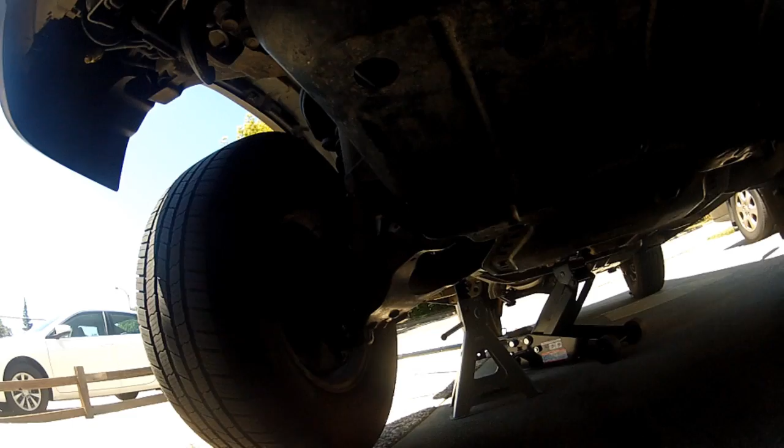Going out to the truck. Not ideal because I'm at a slant, but I got two good chocks in the rear of the truck. I got just the passenger side up, resting on a 6-ton jack stand, and I have the hydraulic jack sitting underneath the cross member with a little bit of weight on it just so it doesn't move, so in case that jack fails, it's a backup. And here's the chocks, so I won't roll back. Ideally, it'd be better to do this on a flat surface, but I can't start my truck to get into the garage, so I'm going to work on it right where it's at.

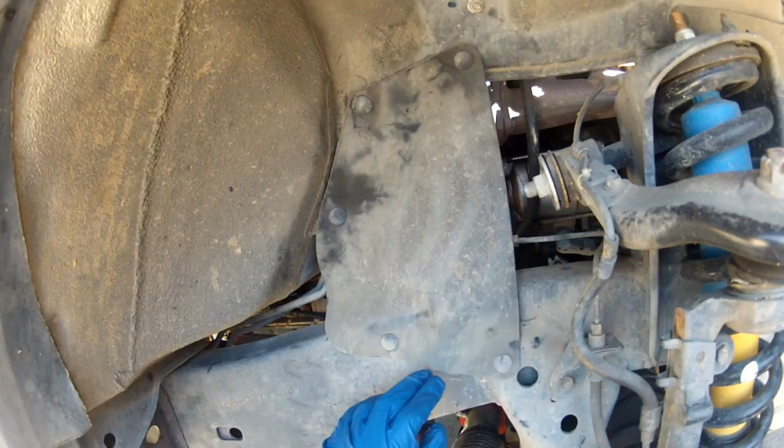The next thing I'm going to do is take off this little rubber cover. They just kind of slip off these attachment points. I don't know if all the years are like this, but this seems pretty easy. And I just want to see what's going to be the best way to get at the starter bolts.

This is the starter right here. The contacts are down here, you could see them. So I'm just looking to see how I'm going to get this thing off. I think I'm going to take the rear skid pan off and see if it's going to be easier to get to the bolts from the bottom as opposed to going maybe behind the exhaust here. So I'll figure that out and come back.

Okay, next I'm going to take the rear skid pan off. These are 12 millimeter.

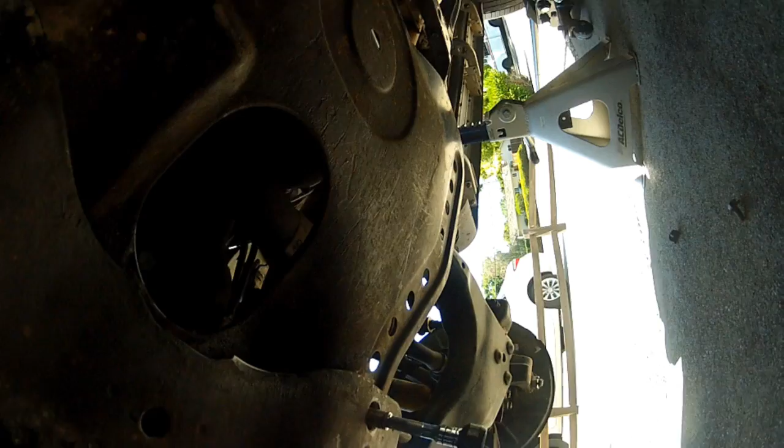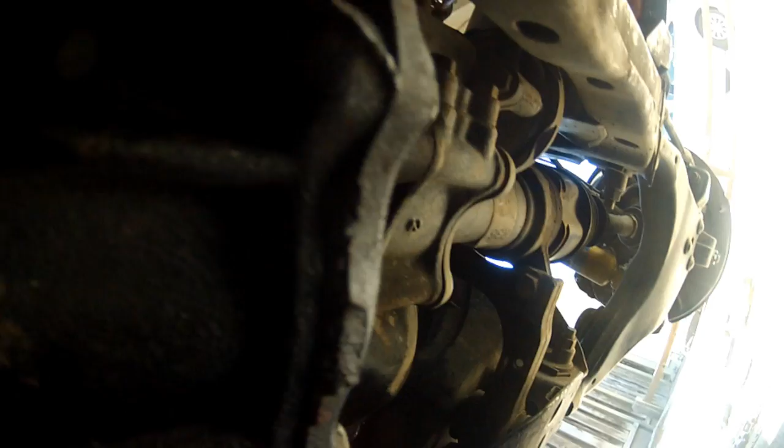Okay, and this thing just unsnaps right here. It's got a little lip. This little lip right here goes into here. So now that's out of my way. And I'm going to get a better look at the starter.

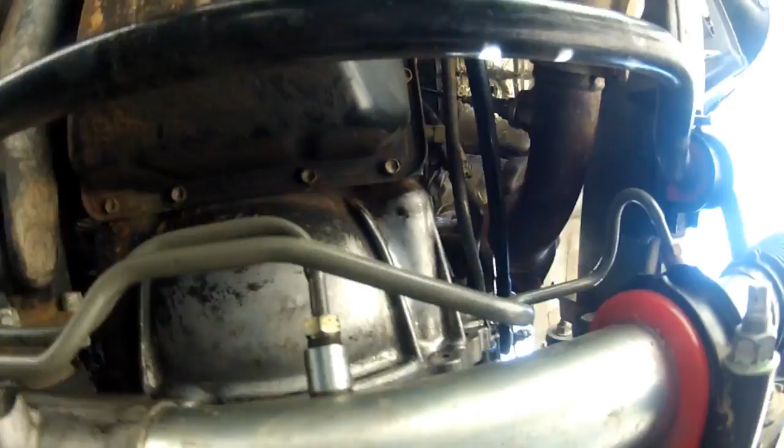Okay, so the starter contacts are the connections right here. So I think I'm going to try to get those undone first and then work on getting the bolts off that hold the starter onto the transmission.

So I got a 3/8 inch ratchet with a short extension with a 12 millimeter socket, and I'm able to break it loose, and then just enough room to get your hand in there to take the nut off, and then you can take the contact off.

And I do have the battery disconnected, by the way. I mean, I had to because the starter was just running constantly.

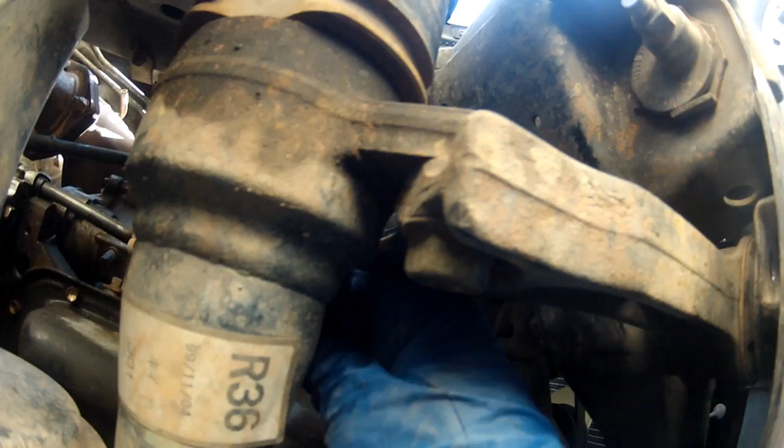The next thing I'm going to do is try to take this bottom electrical connection off. So I was able to reach my hand up through here, right along the side of the oil pan, and then get my hand up here to press the little clip on the back and pull it out. So you can see that I got it loose now. So I got both things disconnected.

Now I'm going to work on getting the bolts undone or loose. And it looks like there's one up here where my index finger is and one right here where my thumb is. So thumb, index finger, those two bolts. I don't know if there's any more holding it on, but it looks like that's just it.

I do remember reading a write-up on this that the best way to get the starter out, so before loosening the bolts, I'm going to loosen this brake line bracket and this one right here, the bolts on the other side. And I read that you can pull the starter right out through here once you get the brake line out of the way, because getting it out through the bottom is almost impossible from what I read. I think on the two-wheel drives you can get it out through the bottom, but on the four-wheel drive models you got to get it right through here, or some guys just work on the starter inside the engine compartment rather than pull it out. But I'm going to see if I can pull it out and work on the solenoid on my bench.

So I'm going to disconnect the bolt for here and here first and get these out of the way. Looks like it's a 12 millimeter also. A lot of 12 millimeter bolts on this truck.

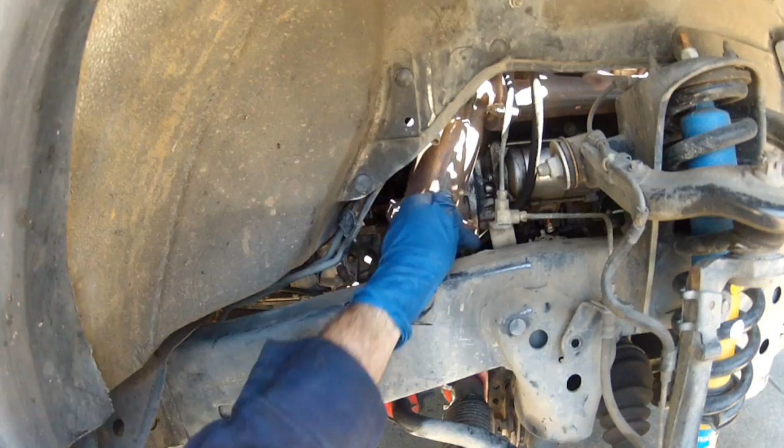Okay, that one's free. I'm going to have to get underneath and see how I can access that one. So I'm on the inside of the passenger side frame. I've got a 3/8 ratchet with a 12 millimeter socket, no extension.

So in case you can't see it, right here. And it broke free pretty easily. I'm guessing if you're in the rust belt this might be a little harder, but mine came loose pretty easily being a California truck. So I'm going to take that bracket off now.

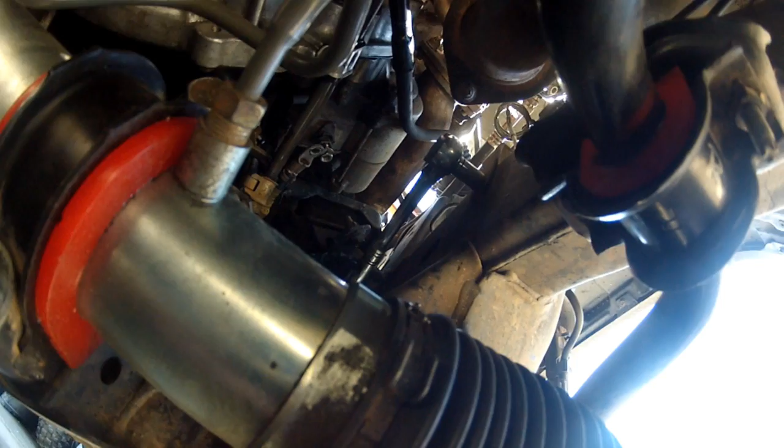So I started it, broke it loose with the 3/8 ratchet. Now I'm going to finish it off with this Milwaukee cordless. A lot easier than taking a lot of short strokes with the ratchet. Okay, now I'll be able to get the bracket out of the way.

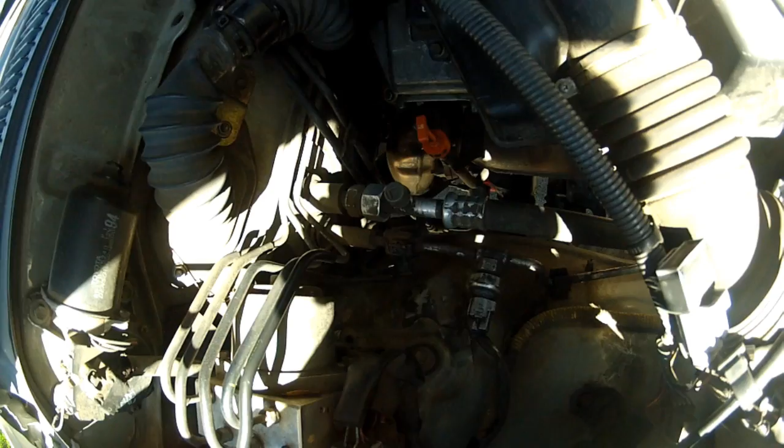There's a clip right here that holds this brake line on. So I just popped it out of the clip and pushed it over so I can get a little more movement. I won't know until I start trying to move the starter out if this is going to work to get it out this direction, because I'm not able to get the brake line out of the way as much as I thought. I'm able to pull it over pretty far, so maybe that'll be enough.

The thing I'm remembering now, you have to remove a section of the transmission dipstick. So right underneath the valve cover, I don't know if you can see that, there's a bolt right there. It's a 12 millimeter bolt.

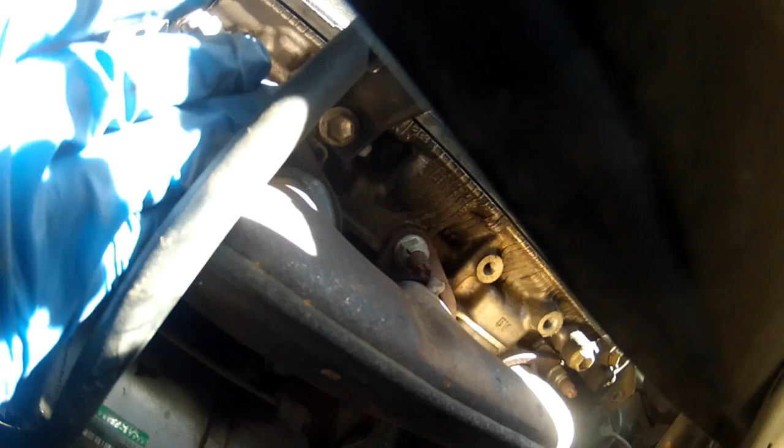Staring right at it, it's got a bracket that holds the transmission dipstick. It's a 12 millimeter, and I'm going to access it from right through here with a long extension, 3/8 inch drive.

And that's loose. Didn't take much to break it free, and I'm going to remove that.

I have to remember to go up top and pull the dipstick out first so I don't bend it. So I'm going to pull the dipstick off and then remove the tube. You can see I put a shorty extension and a little bit longer one. If you have just one longer one, you can get in there.

And got that bolt out, and it looks like this should just pull right out. There we go. I'll just bring it out this way if I can. Maybe I'll take it out the top, it'll be easier.

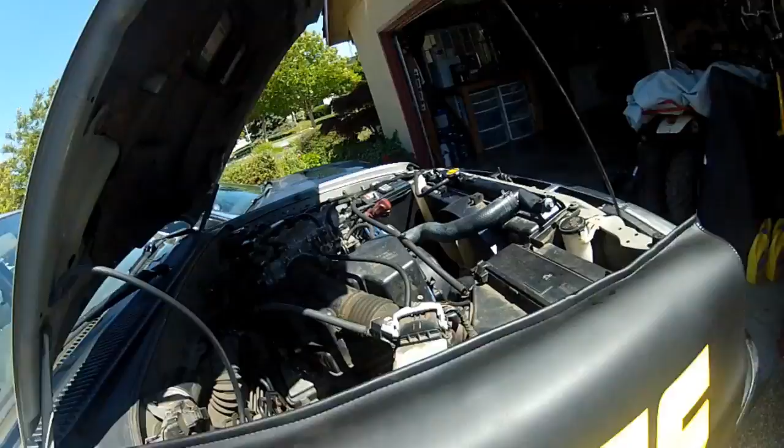Where is it at? There you go. There's the upper part of the transmission tube. You can see a little O-ring here, so I guess you got to make sure you don't lose that. That helps create the seal to the bottom part of the tube.

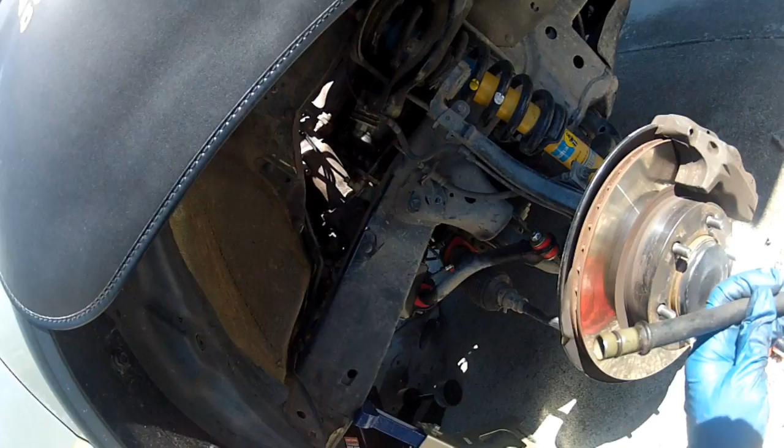Okay, next step, remove the starter bolts. You guys are probably going to shake your head on this one, but I joined a 10 inch half-inch extension to another 10 inch half-inch extension, to, I don't know, a 4 or 5 inch extension, to a swivel, to a deep 14 millimeter socket.

I was able to get to it because it's too tight in here to turn a wrench, so I went all the way back past the cross member for the transmission and was able to use a breaker bar right here. It was about a foot long, and I was able to break the bottom bolt free, and now it's turning freely.

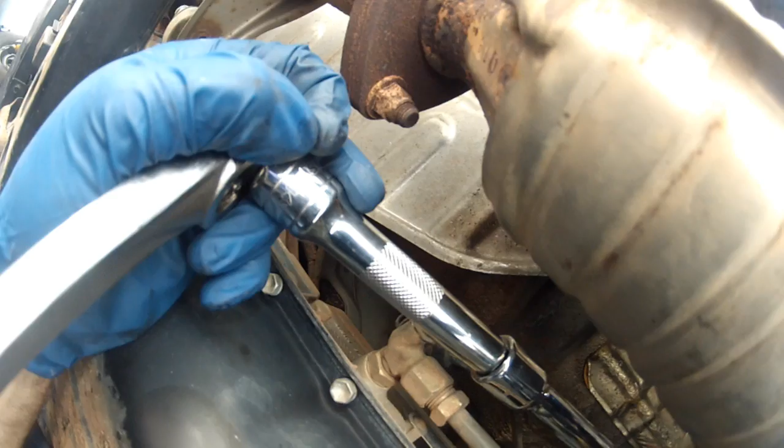So the next challenge is to get access to the top one, which I think is going to be harder. Okay, I was able to get to the top one by using my 1/2-inch ratchet to a short 1/2-inch extension, to a 10-inch 1/2-inch extension, to another shorty, to a swivel, to a short 14 millimeter socket, and it worked.

I just had to come up from the bottom at an angle to where I can turn the wrench. You can see I have a little bit of room now to turn the wrench, and I was able to break it free. So that's how I got the top one busted loose.

Okay, so now I've got my hand up through here supporting the starter while I'm removing the top bolt and unscrewing it. Hopefully you can see this, but maybe not. Let me adjust the angle here.

So I'm using my left hand to unscrew the bolt while supporting the starter with my right hand, and the bolt's free. Now the starter should come out. Yep, it's falling out. So now I'm going to try to come up through the wheel well and bring it out.

Okay, I'm trying to make this thing come out of here. How it's going to come out, I don't know. Let's see. I think it's going to come out, but I don't know. Let's see. Maybe not. I'll have to fiddle with this, and I'll come back and show you if I was able to get it out this way.

Okay, look at this orientation. So the starter connection to the battery is right here, and the electrical connections right here are where you took the clip out. So I had to rotate it and bring it out in this orientation. I had to crank on this a little more to get it out of the way, and it comes out. So there it is. Now I can work on it on my workbench and see if I can get this thing apart and fix it without spending a whole bunch of money.

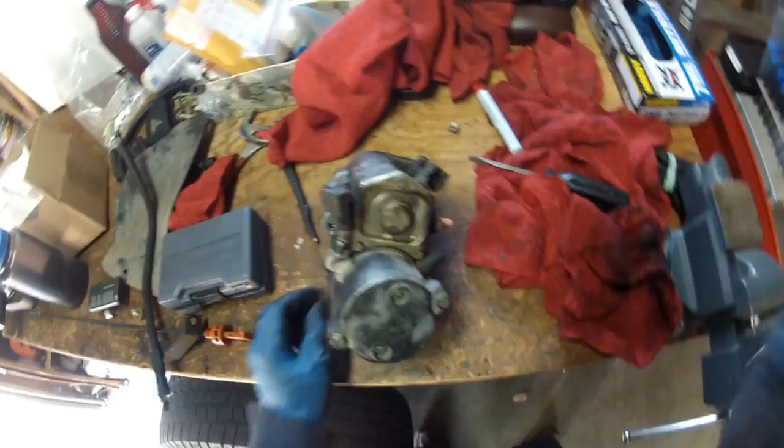Okay, it looks like the solenoid is in here. I could just look it up, but I'm pretty sure this is the solenoid because this is where the electrical connections are. I got to take off these 3 little nuts. I don't know what size they are. Then the contacts will be in here and I'll be able to see what's going on. Then I'll have to take off these bottom nuts here to get the contacts out, from what I remember seeing online. So I'm going to figure out what size that is.

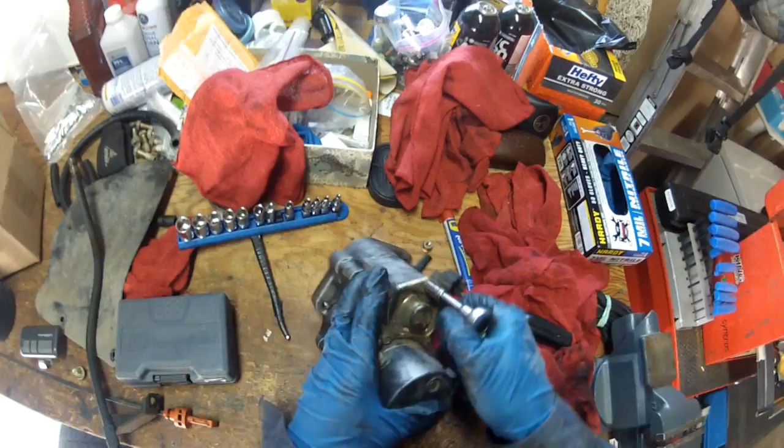Okay, it looks like to be an 8mm. I'm just using a 1/4 inch ratchet with the shorty extension.

I read that maybe the contacts are bad, and that's why it's not coming out. Anyways, I read that it could be the contacts that are bad, so that's what I'm going to check. Got to get this socket off this little nut. Okay, I got the socket off of there.

Gonna take these little 8mm bolts out. That's holding onto a little bracket right there. Got to remember that that goes in the bottom left corner. And then get this one out.

I have never worked on a starter. I've actually never replaced a starter, so I've been pretty lucky, I guess.

And it's stuck in there again. Oh well. So let's see what this looks like. This is the plunger.

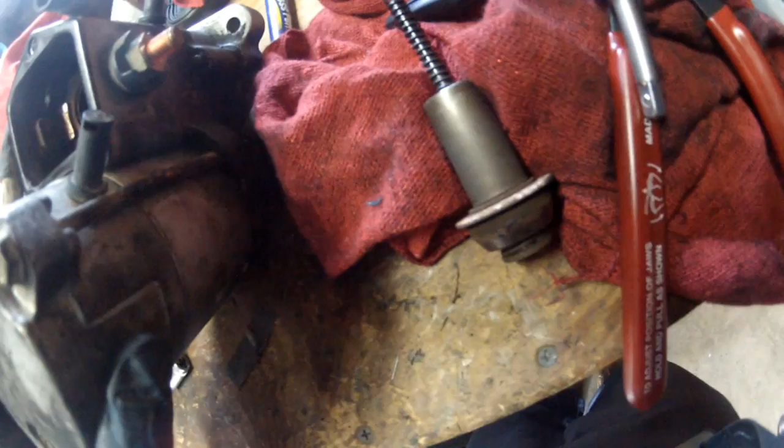Oh yeah, you can see that the contacts are worn down, especially this side right here, this right side. You can see that it's really worn down. The left side's not as worn, so maybe that's my problem. So I'm going to take these things out. Actually, I'm going to take the whole starter and see if I can get contacts for it at the local Toyota dealership, and I'm going to try to get a replacement plunger too. That's what I've read guys do. So hopefully I can replace the contacts, get it back together and try it out, and hopefully my starter doesn't continuously run and run and run.

I'm now taking off this contact. Oh, it's a little stiff there. Maybe I'm going to get a bigger ratchet. This is a 12mm nut that holds this contact on, the smaller of the 2 contacts, on the left side as I'm looking at it this way.

It looks like I gotta get this other one off so I can pull the contact out all the way. That's a bigger nut. Okay, it's a 14mm.

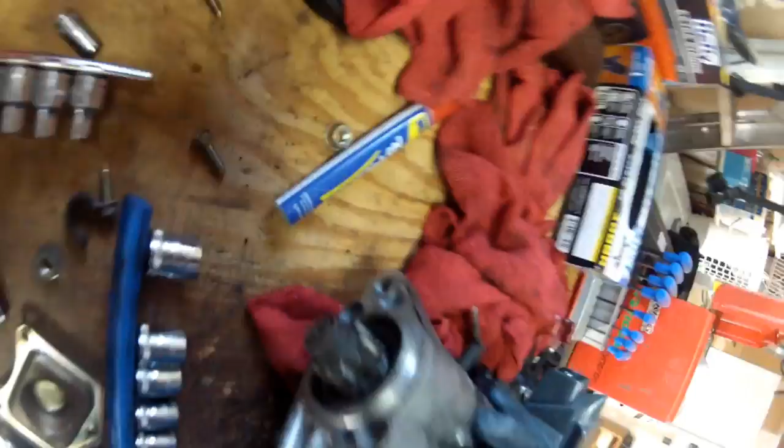So I got to remember that that one goes on the outside. Then this one's next. What the hell is that? Then a washer, and that. Let's keep it in order. That's next, and then...

How is that thing wired in there? I'll have to figure this out. Okay, I just had to push it a little bit. So there's an O-ring here. So next in line is an O-ring, and then that's when I could pull this thing out.

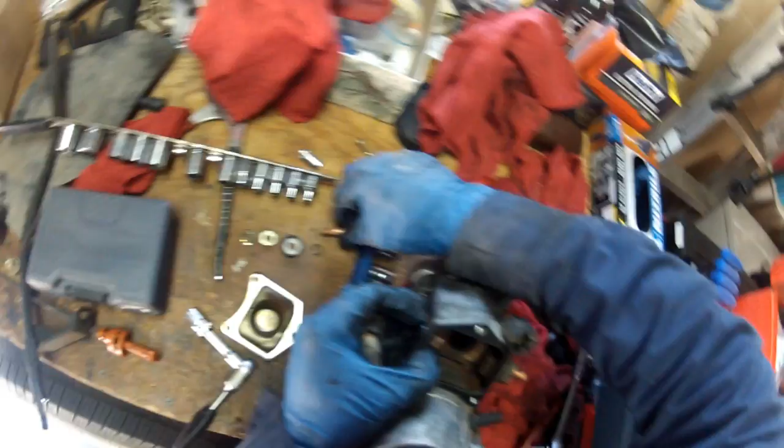So this is the nut, and the orientation is the bolt goes through this little contact here first. Let me see if I can get a light. I should be able to see that. The bolt goes through the contact, this right here, connected to the wire, and then the contact that I'm going to replace sits behind there. So it goes in like this, like so. I just got to remember how that goes. So pull the contact out, and I'll do the same with the other side. Get it out. So there and there is the orientation.

And I'm going to do the same with the other side. I'm going to take this bolt off and get the contact out.

Let's see what size this is. That's a 14 millimeter.

So now, not the cleanest working surface, but we went left to right, and now I'm going to go right to left towards here. Looks like there's some type of washer here. That's next. And then there's probably another O-ring here, so I'm just pushing on this thing, push it all the way out.

This is a better look at the plunger. So it slides in this way like this, and this is the surface that contacts the contacts on either side.

I can't tell if this is worn. It looks pretty scored up there. So I'm going to try to get a replacement for this too, along with the contacts here.

Well, my trip to Toyota didn't pan out. They wanted $80 for this plunger, a spring, and the two contacts in there. So I said no way, I'm going to see if I can find it cheaper. That's crazy, $80 for two little contacts and a plunger. So I'm going to see if I could find it online.

And this is kind of interesting how this works. So when the plunger goes in like this, it pushes the starter into the flywheel, turns it, and that's how your motor starts. Kind of cool to see how it works. So I'm going to see if I could find the parts online and save myself some money.

Okay, I am back, 3 days later. I had to go to work. I'm a firefighter, so when I'm at work for a couple days, I had to order parts.

I tried my best to find a good price on parts, but I sort of failed in that regard because I looked on Amazon, I looked on eBay, I looked at Toyota online sites, and I could find parts for every Denso starter under the sun, but I couldn't find the contacts and the plunger.

This is the plunger, these are the contacts for this Denso starter. So I went to the local dealer, Stevens Creek Toyota, and I got some kits, and I'll show you those right now. Before I show you the packages of parts...

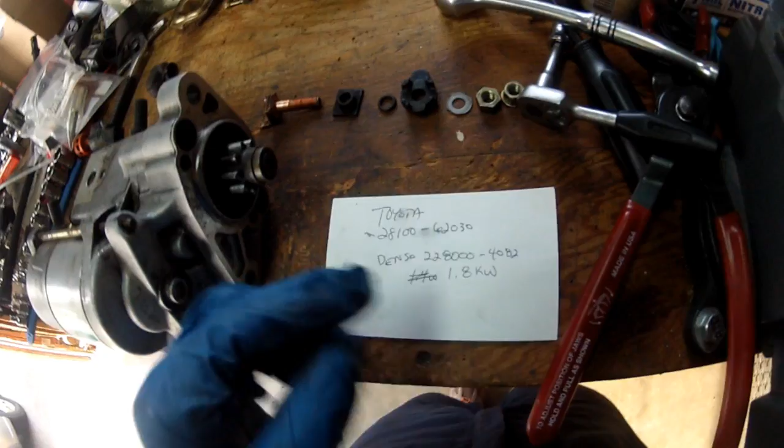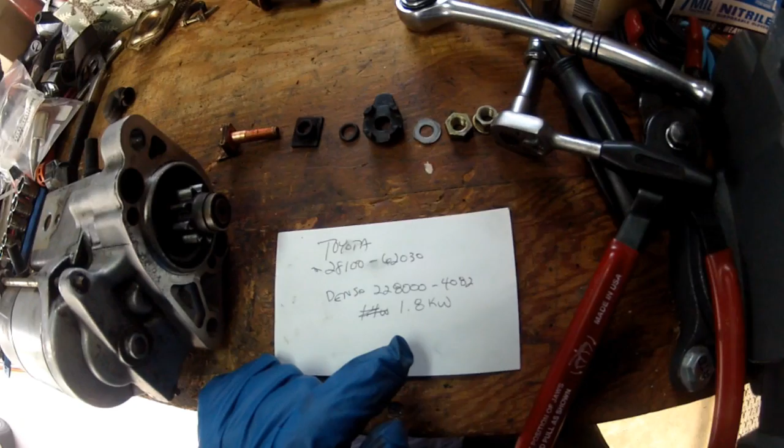My starter on my 2000 Toyota 4Runner SR5 four-wheel drive, the Toyota part number is 28100-62030, and the corresponding Denso part number is 228000-4082. Through my research, and then I finally confirmed it at Toyota - at first they were telling me I had a 1.4 kilowatt, but they were wrong initially. So this Toyota starter, this Denso part number corresponds to a 1.8 kilowatt. So you got to make sure you're ordering the right parts.

And so, like I said earlier, I searched for parts for this Denso starter, and I could not find the correct contacts. I don't know if it really makes that huge of a difference, but none of the things listed my starter as the correct starter for the parts they were selling, so I had to go to the dealer.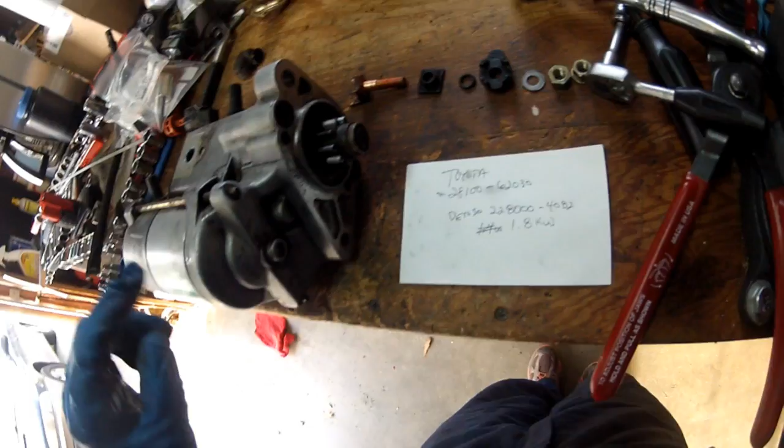So anyways, this is the orientation again of how these parts go in. As you're looking in here, this side right here is this side. So you got the big contact with this bolt that goes through. This plastic piece fits in right through there, that raised edge goes in through there. Then on the outside, you put the O-ring over the bolt.

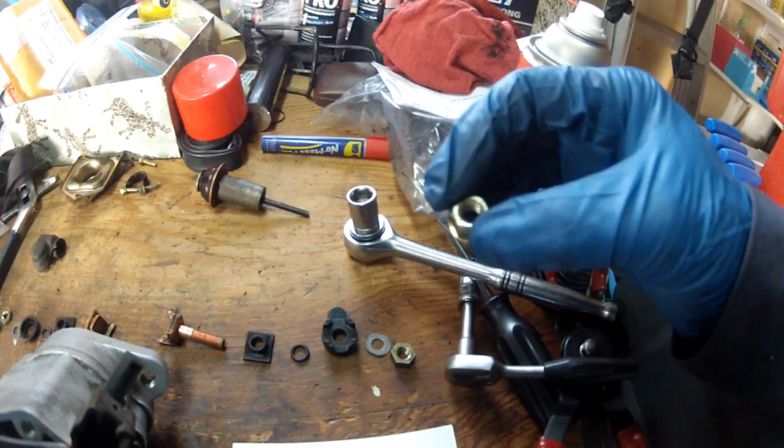Then next is this, it goes in this direction. Then you put the skinny metal washer in between there, between that hole there, and then you put the bolt on to secure it. This last bolt is for when you get ready to install it - this installs the wire that leads from the battery to the starter. And on the left side, the orientation is looking at the contacts with the plug-in clip on the upper right side.

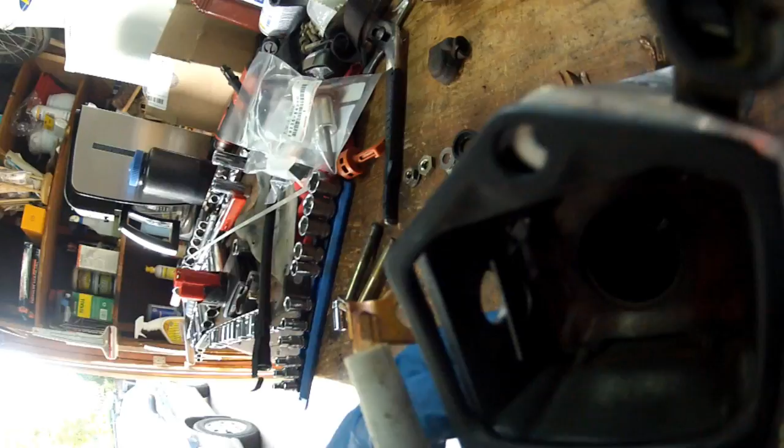The left side orientation: you've got the bolt with the contact. The copper contact slides behind this connection in here. This metal connection, the back of the contact slides behind there. Then the bolt slides through the hole, or actually, you've got to get this plastic piece in there first, facing the raised edge out.

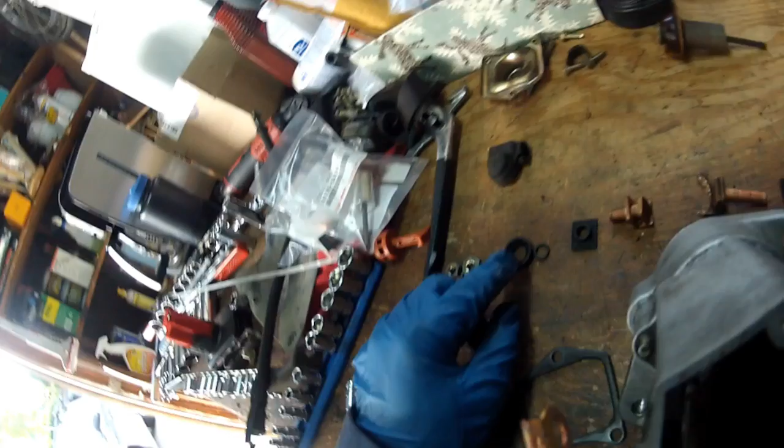Then the next thing is you push the bolt through, you put the O-ring on again, and then this piece fits on like this. And then you put the washer inside the hole here, and then you tighten it down with that nut, and then you slide this connection after you put that nut on, and then you tighten down this connection with this. I hope that makes sense.

If this wasn't clear, well, when you take it apart, just pay attention. Lay it out like I have it laid out so you don't make a mistake.

And then I'll show you now the parts that the kit that I bought from Toyota came with. So here's the plunger part number. This replaces this plunger right here. So it's a 28235-54380.

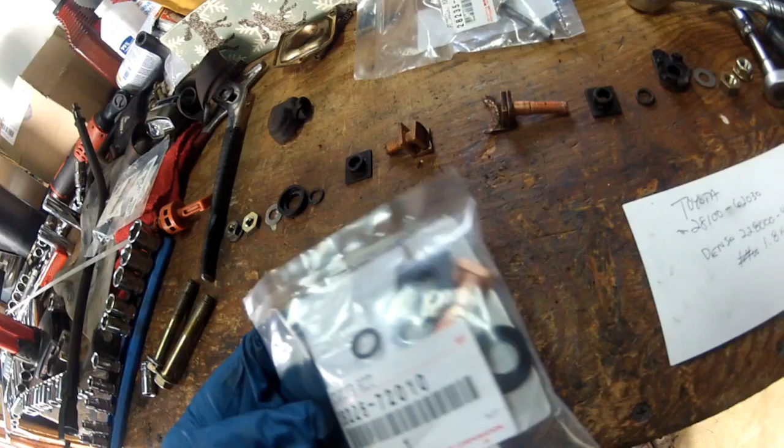Then this package is the small contact side. You'll see it comes with all the pieces. I really didn't need all those pieces, but it's kind of cool that it did, so maybe that's why it costs a little more. So the left side contact is

28226-72010, and then the right side contact with the bigger copper contact is a 28226-54340. Just remember that this is for, again, the model 62030. If you have a different starter in yours, then you're going to have to order the correct parts for that. But if you actually have the same one, then I've done the work for you. You just go to the Toyota dealership and ask for these parts.

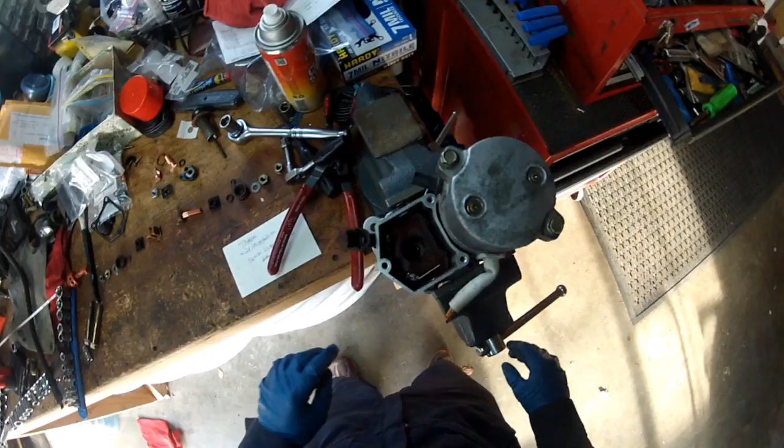So now I'm going to assemble the starter with the new parts. They say work smarter, not harder, so I just finally put this thing in a vise. So this plastic piece goes in right like that.

And then the contact, from what I remember, fits that direction. I'm going to put the bolt through. Wedge in there. I guess as you tighten it, it wedges in there. Then I put the O-ring on there.

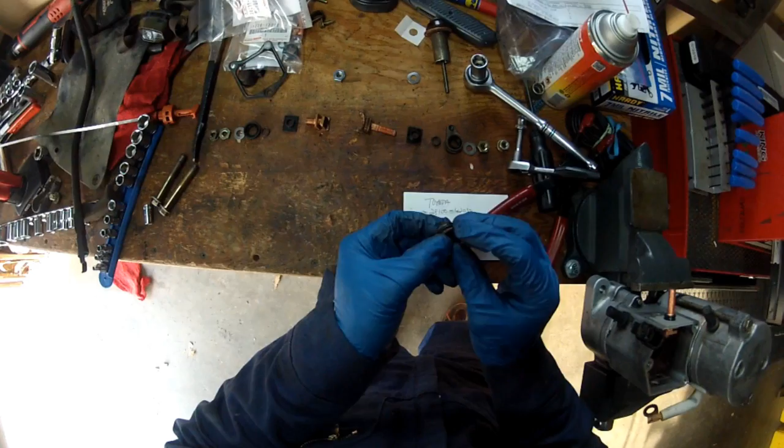And then comes this piece, it's separate, so this little maroon gasket or whatever you call it goes on the edge there. You could kind of see the old one had it. I didn't even notice it was there until I looked at the new kit.

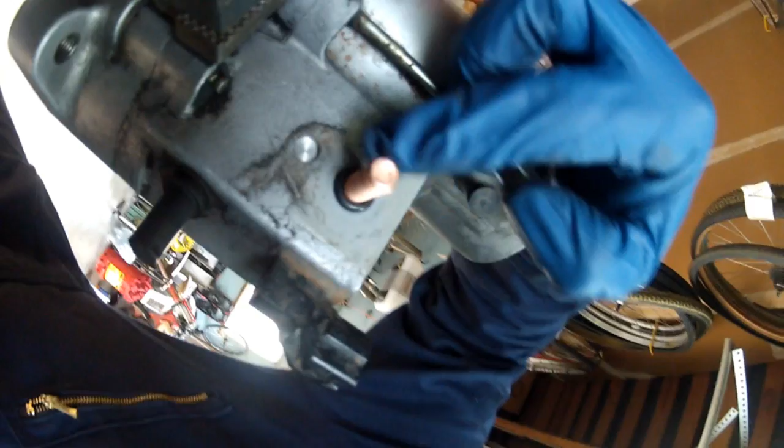So then there's a little indentation right here. I don't know if you see that. See that indentation right there? So this fits in there like that. Okay, put this back on my head. And then we got the washer.

And then we have this nut. And this thing is knurled. I don't know if you saw this, but it's got knurls on it. I don't know if this one had it. I guess it did, but then it, that's why it's like wedged in there. That's why I can't pull this thing out. So this has knurls that kind of force into there and keep it as one.

So I assume when I tighten this thing down, it's going to pull the thing fully into the knurls and seat.

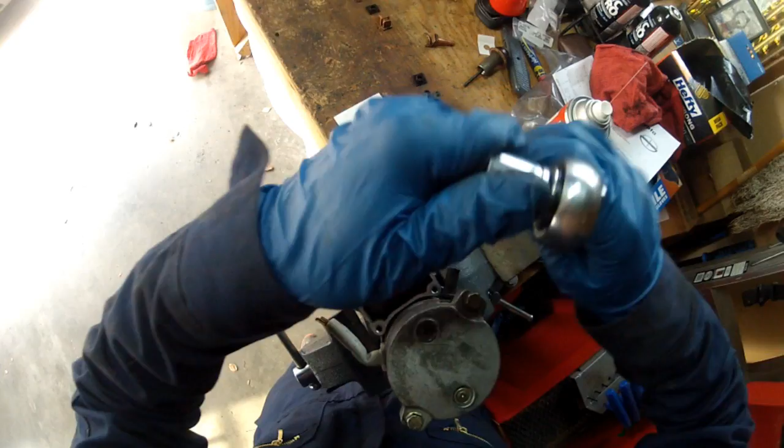Okay, so this was, I think this is the one. Yep, again, this is a 14 millimeter. Make sure I got this thing in the hole there. Yep, and then just pulling it in until it seats all the way. I don't know how tight this thing has to be.

I don't even know if there's torque specs for that, but I ain't going to bother with it. You need torque specs? I don't know if I'm going to actually look this up for you. So that's one side right there. I got it all together. Now I'll open the next package.

Let's see here. X-Acto blade. Okay.

And then following - remember I said that this plastic piece goes in. So right in the back here, slide it in, the raised edge pointing out. Then the contact goes behind this metal piece right here.

Like that. You put the new bolt towards the outside. Then comes the rubber O-ring. Then comes this piece that fits over the O-ring.

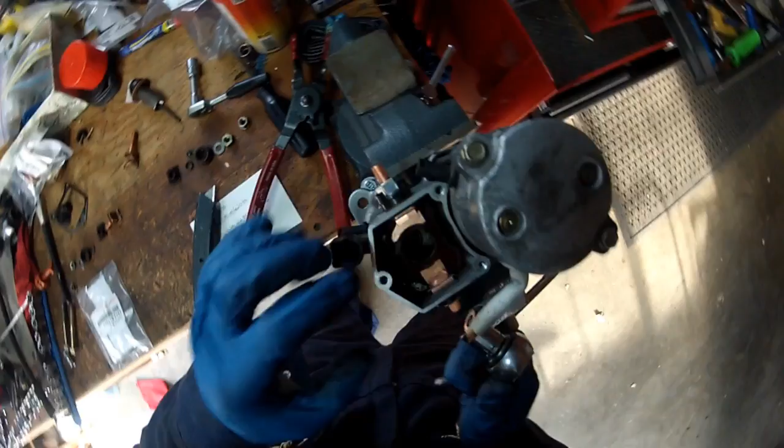Okay, so both new copper contacts are in there now. I got to remember to use these two on either side.

Now I'm going to get a little bit of grease. I cleaned up and got the plunger out of here. I cleaned up the spring too - that's the only thing I didn't really replace. I think they probably wanted too much for it, or I just forgot it. Who knows? But I'm going to just use some grease to lube this thing up, maybe for less resistance. This is just bike grease, but I use it for bearings and stuff, so I'm sure it could handle this application, no problem.

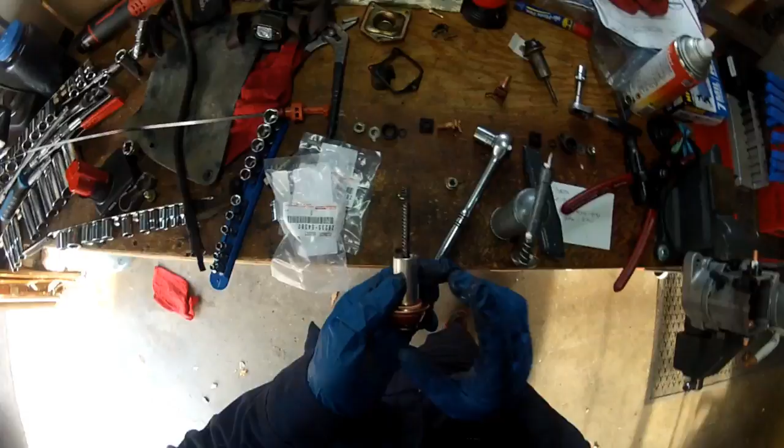Slide this on there - they call this a plunger or a magnet. This just drops down in there. You can see how it makes contact when you hit the ignition, then releases. Mine wasn't releasing. You can see down below how it's coming out - it contacts the flywheel, turns the flywheel, starts the engine, then backs off and retracts.

Okay, this rubber seal came off. This seals the solenoid. The solenoid cover goes on like so, and then get the bolt started.

And this particular bolt goes here because it holds onto the wiring harness. Okay, and then this one - I found this one's the hardest one because you got this little breather in the way, so you got to crank this breather over to get it out of your way so you can turn the nut or turn the bolt.

Okay, so that's tightened on there, and then this boot just goes over the top. Twist the zip tie so it won't move. There we go. Jerry rigged, but I wasn't going to try to find this boot.

I think you can actually find it on a website, but so this thing is ready for installation, and I'm going to hope that this was the problem of why it was sticking.

Now, if my memory serves me correctly, this was the orientation that I got it out. So pull this brake line out of the way, fit this through, and then I'm going to have to rotate it once I get it through here into position. Pull the brake line out of the way a little more.

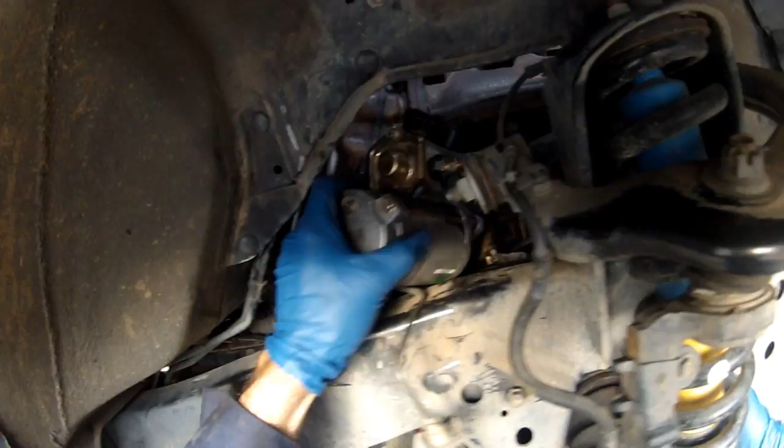There we go, it's through, I think. Yeah. I got the arm underneath there. I gotta readjust - I can't remember how I got my arm twisted in there. Okay, well, I got my arm in there somewhere. Okay, I think I got it now. I figured out how to get my arm in there.

So what I remember was that the battery contact was facing down, and then I gotta support this thing while I try to get a bolt in there. That might be harder than I think.

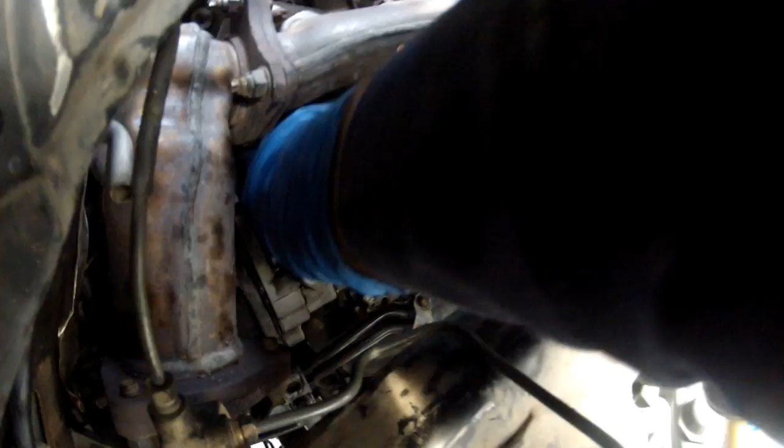Looks like I got the bottom one going. See if I get the top one going. Doing it all from the wheel well here - is this the best way? I don't know. I have no clue, it's kind of a learning experience. I did read up on it, but would it be easier from the bottom? Could be. But I seem to be getting it. Just reaching up - I almost got the top one tightened all the way.

Cinched up just with my hand. Okay. And I'm working on the bottom one now. So this is going to take a little bit, so I'm going to cut and come back.

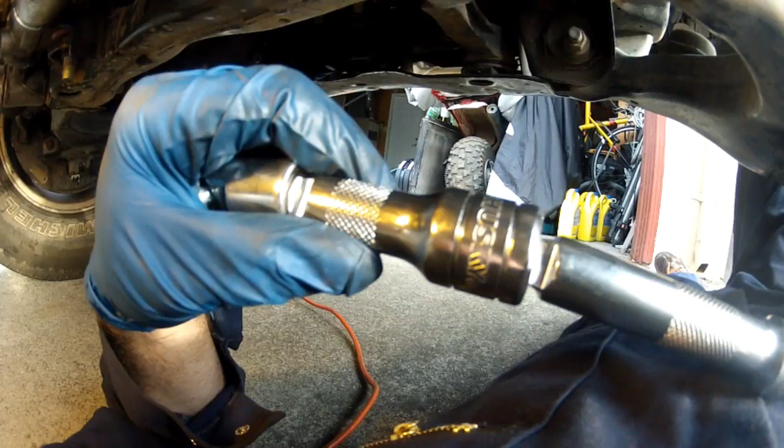Okay, look at the setup that I'm using to access the bolts to tighten them. I got a 14mm short socket, a swivel, a short 1/2 inch extension, a little bit longer extension, and then a 10-inch extension. I'm using a 1/2 inch ratchet so I can get up there and tighten them.

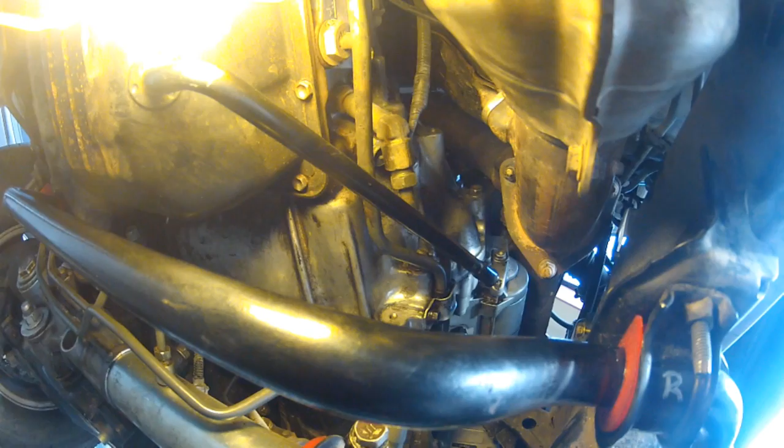What are the torque specs for this? I don't know, I could look them up for you and put them in the video later. But I think to get an accurate torque reading, you have to be perpendicular to the bolt - you can't be at a harsh angle like I am trying to get at these bolts. So I don't even think a torque reading will be accurate anyway. So how tight am I going to get them? Pretty tight - those are pretty big bolts, they can handle a lot of torque, so I'm not going to crank on them super tight, but I'll get them pretty tight with the 1/2 inch drive and call it good.

So here I am tightening the top one.

That's not getting on there square as I hoped. There we go. Yeah, that slipped off. Not as easy as it looks.

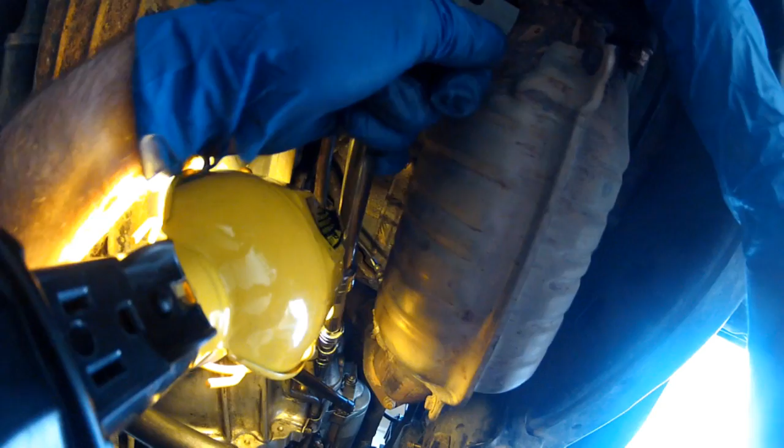Tighten the bottom one a little bit. Let's go back up to the top.

I'm sure, well, I'm not sure, but it's probably an easier way to do this than what I'm doing, but I don't know. That upper bolt for sure is hard to get to. Pretty darn hard.

That's a better contact with the nut there on the bolt. Try to hold it on there a little better. It's kind of funky with the swivel. I haven't used swivels too much to tighten things, but it works.

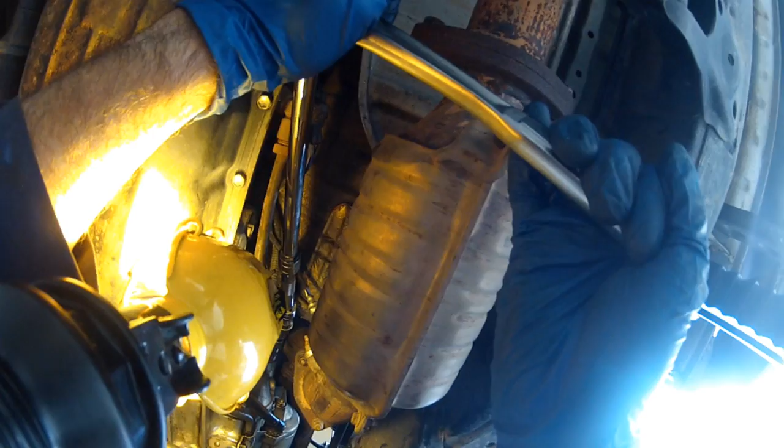So that's what I'm going to do. You got the gist of it. Using a swivel, coming up from behind to get up onto the bolts.

Okay, I'm plugging in the contact. That's plugged in, and then I'm going to get this wire hooked up. I'm just going to take that bolt or nut off, put the wire on, tighten it up. It's kind of hard for me to film this and do it at the same time, so I'm showing you what I'm going to do next.

Okay, this is the moment of truth. I got the starter hooked up, I got the electrical cable bolted on, and now I'm going to see that it starts before putting the brake line brackets back on and putting the wheel back on. I'm not going to assume that I fixed it, so I'm going to try to start it now, and if it works, good. Got fingers crossed.

And it works. So replacing the contacts in the plunger fixed the starter. Didn't have to buy another one, just had to fix the one that I had. Now I got to put everything back together.

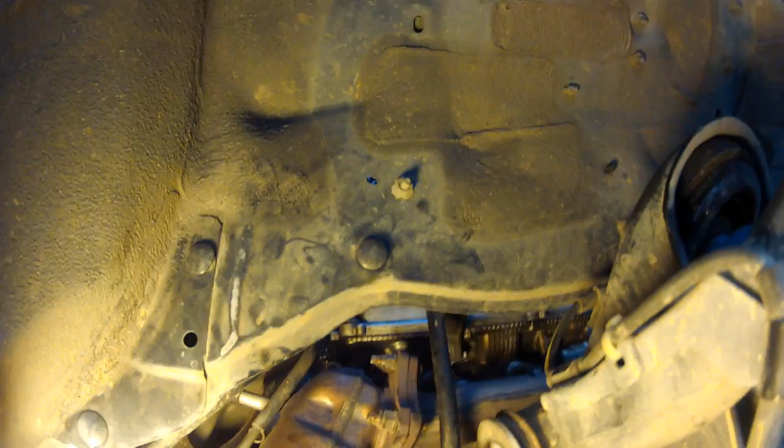What was that? I'm going to get the bolt that holds the transmission dipstick in. It's up there. Let me get it. It's up right there. You could see it. I don't know if the light's messing up with my hand. It goes right there. So I'm just going to get that bolt in through the wheel well.

So if you remember, this brake line goes into this bracket, so I got to lift this up and fit it back into this little bracket here. Snap it in. So that's in.

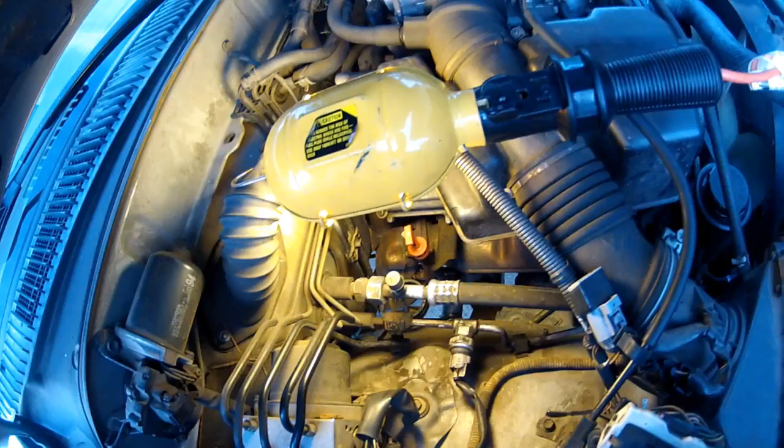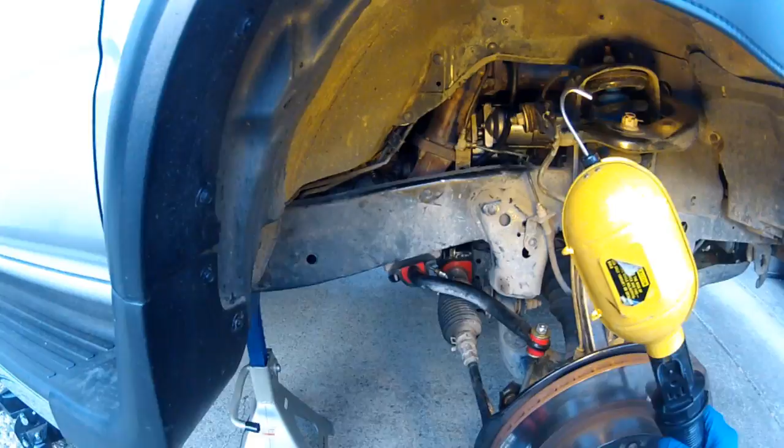The bolts that held the brake brackets onto the frame are really kind of tight and not lubricated, so I'm going to put a little grease on those. So one goes right here, one goes right here, so I'm going to grease it up a little bit and then reinstall it.

So again, I'm going to use this bike grease. Move that up a bit. This tab goes in here like so. I don't know if I got this thing right. Something's cattywampus. There we go. That's it.

Okay, that one started. I'm going to get the other side started too. I have to get underneath the rig to do that.

Forgot there's this little plastic thing that covers the connection. So I'm just going to snap this thing on. So that goes over the main connection. And my bracket is on.

The other bolt on the other side is tight. I'm just going to get this little, whatever you call it, thingamajigger, doohickey. This rubber thing. Get that on next. Okay, got the mud flap or whatever the hell you want to call it.

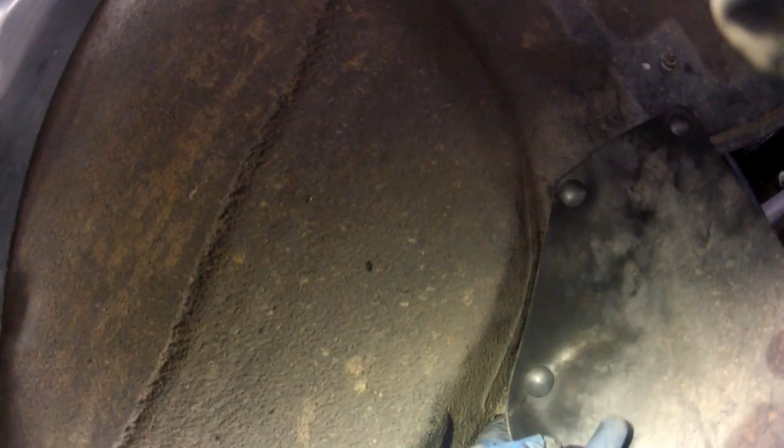Little doohickey. These plastic tabs were kind of pressed against the frame, so I used this small screwdriver set to kind of pry it away from the frame to slip it underneath. And then these over here, you could just reach your hand and kind of push them out from the opposite side, so you can slide the rubber behind it. You just kind of stretch out the hole and fit it around it. It's really flexible. And that is about it.

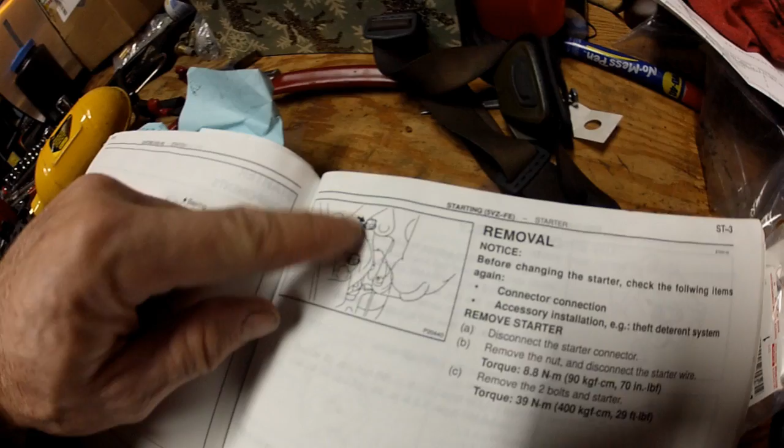I just got to get the wheel on and get it back on all four wheels. In case you were wondering, you wanted the torque spec, if you think you could actually get an accurate torque spec on there. The torque spec is 29 foot-pounds for the two bolts that hold the starter onto the bell housing of the transmission.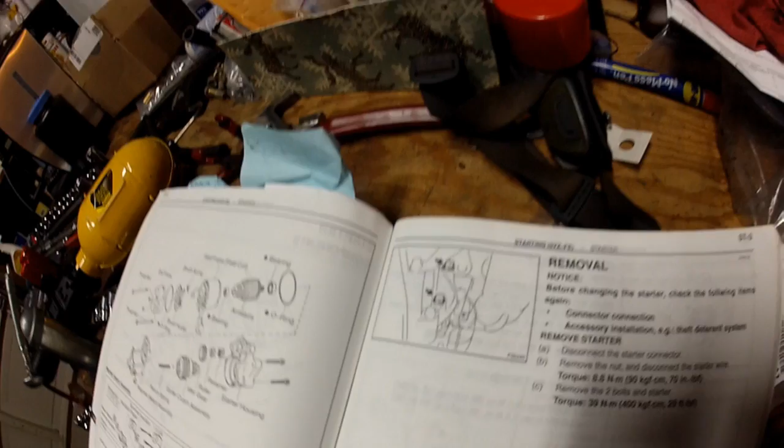I had to come up at an angle with the swivel, and I think you only get accurate torque specs if you're at a right angle to the bolt or nut you're torquing. So I really don't think it's possible to get an accurate torque spec unless you can hit the bolts at a right angle, which in this application there was no way I was going to be able to do. It's too hard to get in there.

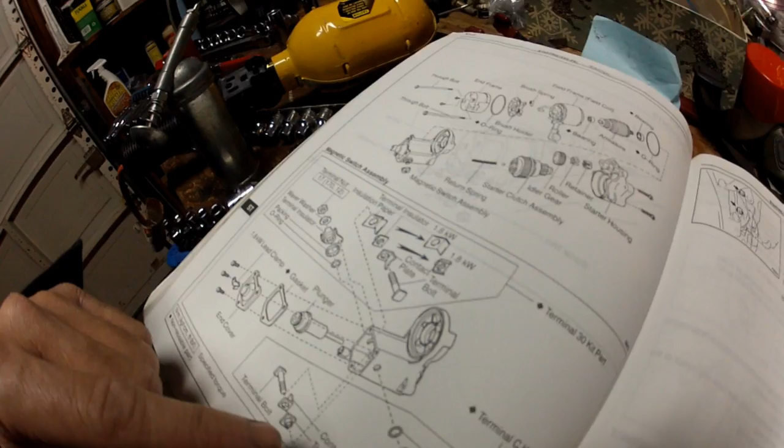Here's a pretty good schematic of the solenoid right here. It shows you from the front going in, you've got the three little screws that I showed you, that held this plate and a little bracket that holds the wire on. You've got the gasket, the plunger or magnet that slides in, and then your contacts on either side, showing the different contacts. The way it's oriented, that was the big contact on the right side when I showed you earlier, and the smaller contact was over here. It's kind of cool, it shows you the orientation, the O-ring, and everything else. So if you forget taking it apart, with a factory service manual you'd be able to get everything back in the right orientation. That's a nice schematic right there.

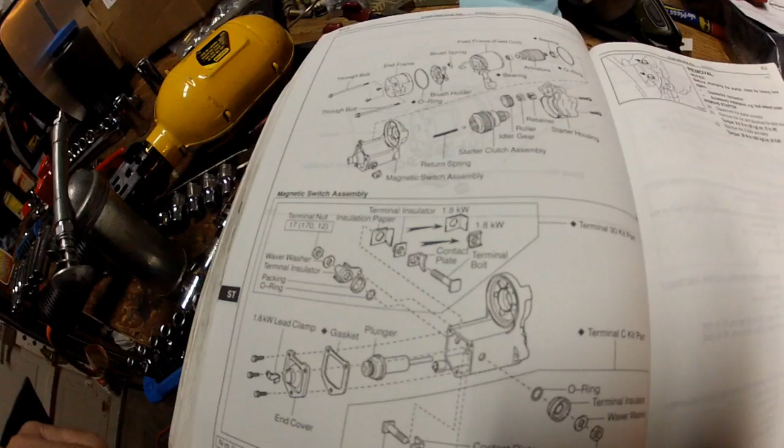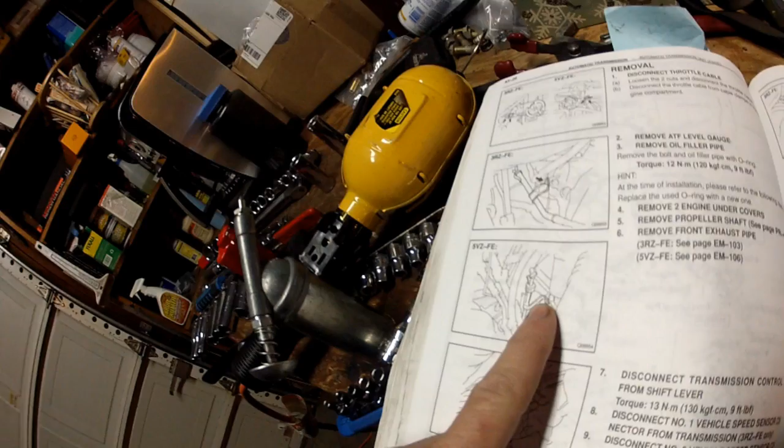The torque spec for the bolt that holds the upper part of the transmission oil fill pipe, the dipstick pipe, is 9 foot-pounds. Right here it says it's for the 3RZ, the 4-cylinder, but it doesn't mention anything for our engine, the 6-cylinder. There's the bolt right there. It doesn't say anything different, so I'm guessing it's 9 foot-pounds. I didn't even bother using a torque spec though, it's only holding a really light tube, so just snug it up and don't strip it.

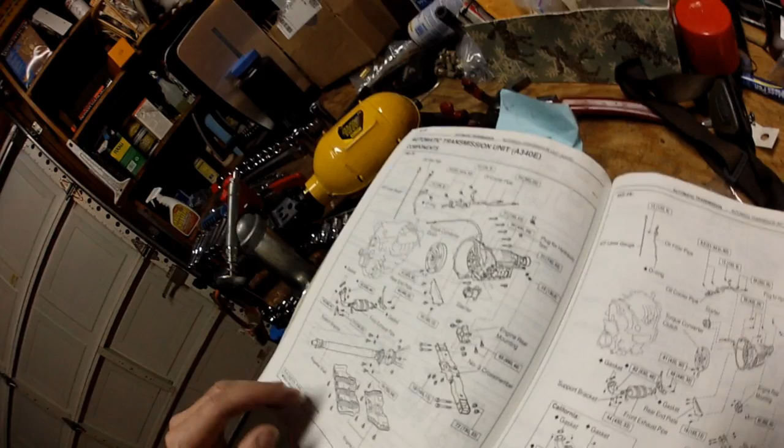That's my suggestion. I also looked for the torque spec for the bolts that hold the brake bracket on, and searched in the braking area, but I didn't want to look all that hard. I couldn't find it on my first search, and it's not that important. Again, it's just a bolt holding on the brake bracket. Cinch it up, just don't over tighten it, don't strip it, and you'll be good to go.

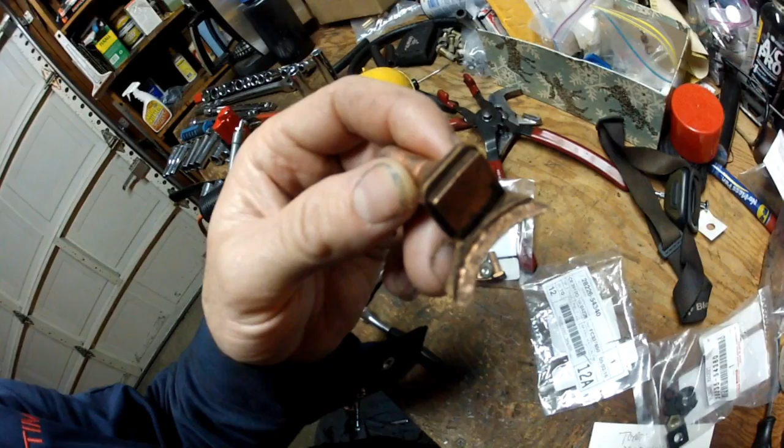So here's another look at one of the contacts, the larger of the two, that makes contact with the plunger. You can see how much it's worn down. This should all be one thickness, and that's a good millimeter and a half or two less, where the plunger over time has come in contact and worn it down. Let me show you the other contact.

For some reason, the smaller of the two contacts doesn't get as worn down. I've seen this on other write-ups and videos, the bigger contact gets worn down more. So I'm thinking maybe that's partly the cause of why my plunger got stuck to the contacts and wouldn't disconnect, and it kept the starter running even with the key off.

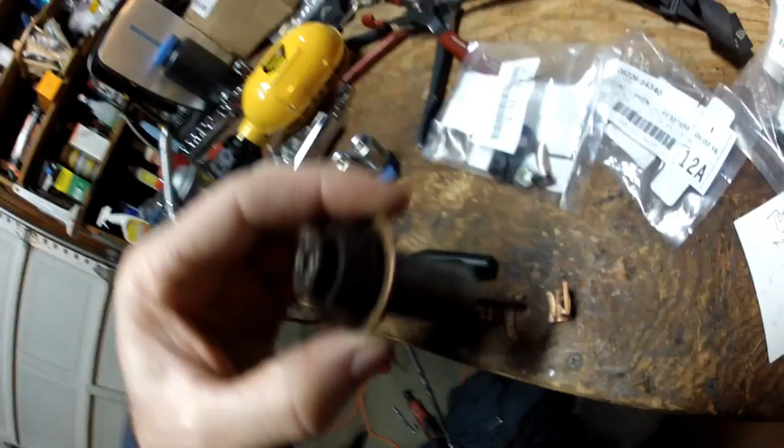I think the plunger... that's not going to stay up for me, is it? So the plunger comes down, right here, and makes contact with these contacts. Because one is higher than the other, maybe it was able to just get cocked in there and stuck. That's my theory. Again, this is how the plunger contacts, one of the contacts - I can't hold both at the same time, it's too hard - but you can see it just wore a groove right in there. The lighting's probably not good enough here, but anyway, it just wore a groove in it, and over time it wore it down.

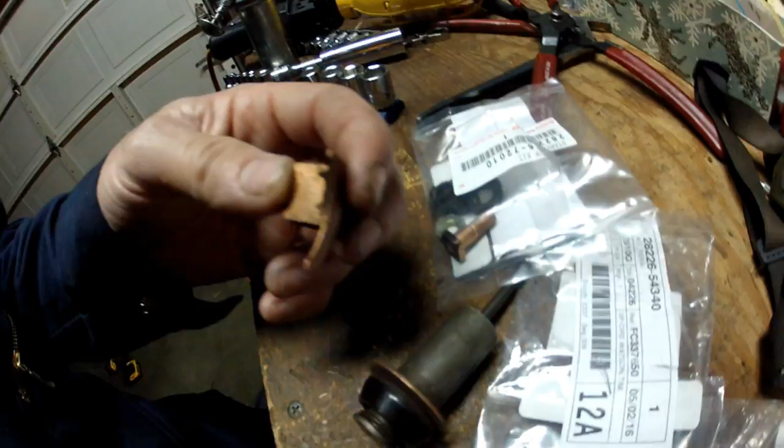So you're probably done listening to me talking. I am Timmy the Tool Man, and I just showed you how to fix your starter without having to replace the whole thing and give up your high quality Denso starter for something you got at O'Reilly's, AutoZone, or Napa. Try this first: take the starter out, take a look at the contacts, take a look at the plunger. If they're really worn down, instead of buying a remanufactured one and having to give up your core - giving your starter to them in order to save money - keep your original starter, buy the contacts from the dealer or wherever you can find them, and fix it yourself, just like I showed you.

One thing I didn't mention is that I spent $69 for these parts. Thank you for watching Toyota Time with Timmy the Tool Man. This was a successful repair, and I hope this helps you fix your own starter if it goes out. Bye-bye.